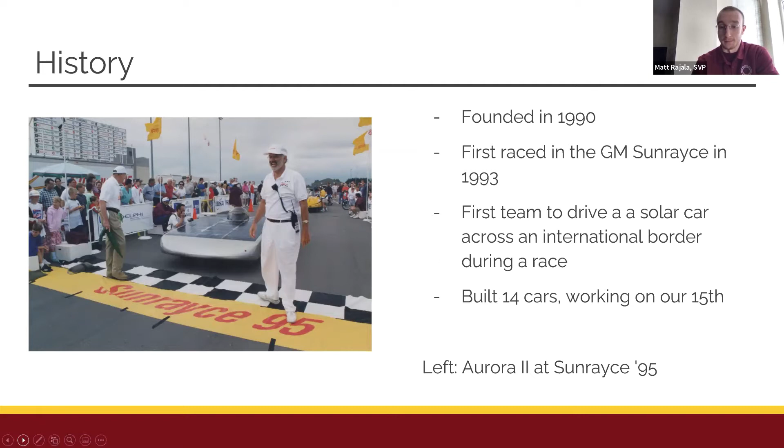To give you some history of the team, we were founded in 1990 by a group of students. We first raced in the General Motors Sunrayce in 1993, and we were the first team to drive a solar car across an international border during a race, which was into Canada. In our past, we have built 14 cars, and we are currently working on our 15th. The 3 main competitions we race in are the Formula Sun Grand Prix, the American Solar Challenge, and the Bridgestone World Solar Challenge, which is in Australia.

Here's the demographics of our team. On the left you'll see all the different majors represented. Our largest major is mechanical engineering, however about half of our team is computer engineering, electrical engineering, or computer science. We do have a good mix of majors across CSE and other colleges as well. On the right you'll see the years in school of our team members, and we have a good mix there too, which is also what we like to see.

So to talk about our races, the first race I'll talk about is the American Solar Challenge, which we refer to as ASC. ASC happens in the summer of even years usually, although it also happened this past year because of COVID delays in 2020.

This race is really interesting to us because it's a different route each time. While it is in the United States, geography across the country varies dramatically, so the requirements and design for the car have to change to accommodate that. With the route changing each time, the race is usually between 1,500 and 2,000 miles, and somewhere between 5 and 8 days long. So this is a race on public roads for endurance over multiple days. On the right here, we have EOS 2 racing in the American Solar Challenge in 2018.

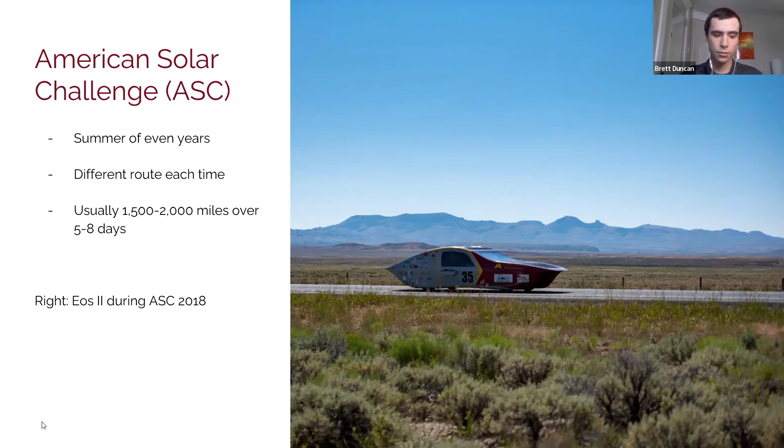The Formula Sun Grand Prix is a track race, actually the only track race that we race in. This race happens every summer, and during even years it acts as the qualifier for the American Solar Challenge. So what that means is you either need to get a minimum number of laps on one day, or some larger minimum number over multiple days, in order to qualify for the road race. This is just to make sure teams have a roadworthy car capable of driving those thousands of miles that they will need to.

Recently we're only attending on years that ASC happens, but we've won this race 6 times, which is more than any other team, and that's something we're pretty proud of. This is Centaurus 3 during the 2011 FSGP.

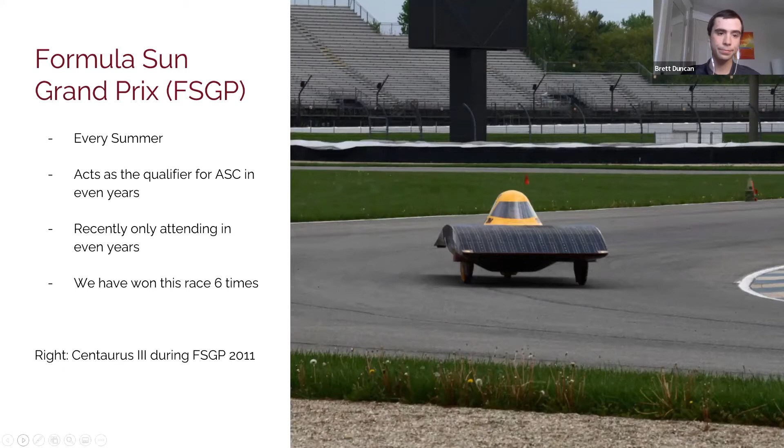Finally, the third race we race in is the Bridgestone World Solar Challenge. This is really the premier solar car race. It takes place during the fall of odd years in October, and it's always the same route. It's in Australia, 3,021 kilometers from Darwin in the Northern Territory along the coast to Adelaide in South Australia, which is along the southern coast. So this is a bit of a different design challenge, very harsh conditions, but the conditions are also a bit more known since it's always the same route.

We'll have experienced members from previous races usually go along and give guidance to the younger members so that we have a better idea of what we're doing. This is a pretty big commitment for team members who go to this race. The team travels there for a little over a month, usually leaving in mid-September and coming back in October after the race is complete. On the right here, we have EOS 2 at the starting line for the Bridgestone World Solar Challenge in 2019.

So these races have 2 different vehicle classes, so we'll talk briefly about those. The first class is the single occupant vehicle class, and as the name says, the cars only have a single occupant who's the driver. These cars are built for speed and efficiency. We've built 10 of these. We no longer build these, but we built these for the majority of the time the team's been in existence.

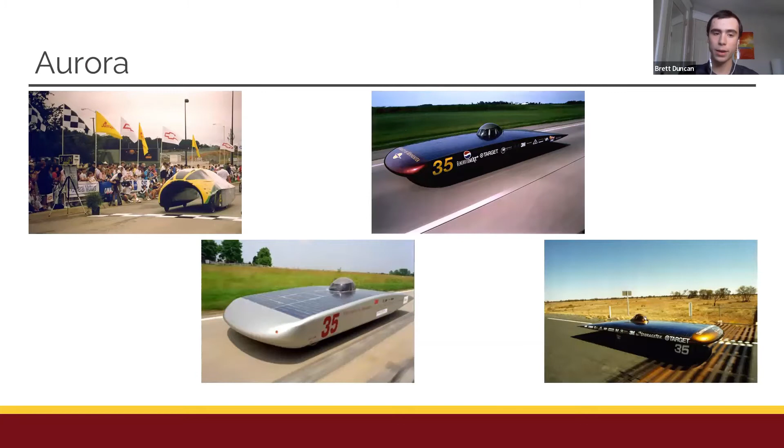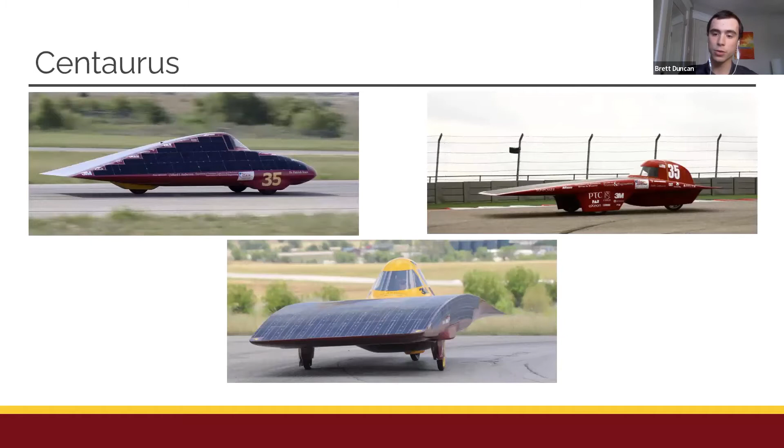But what we currently race in is called the multi-occupant vehicle class. These vehicles have 2 to 4 occupants. While we're still trying to make an efficient car that can make the best use of solar power possible, we also keep real-world practicality in mind and try to build a car that's much more similar to what a commercial EV that you might go out and purchase would be. The reason for this is that practicality is a scoring multiplier in this race.

Unlike the single occupant vehicle class, where the race is much more like a race you'd expect, with the first car to cross the finish line winning, the base scoring formula here is the number of people you have in your car times the distance you carry them, divided by the energy used from the grid. So in this class, you can charge using a standard AC EV charger, and that counts against you.

So you're incentivized not to do that, but you might need to be able to complete the race. And we've been competing in this class since 2013, when this class was first created at the Bridgestone World Solar Challenge.

The main reason we switched to this is we just wanted to really be pushing the envelope in terms of technology and building cars that are not just fast, but also more practical and more similar to an EV that you might one day buy.

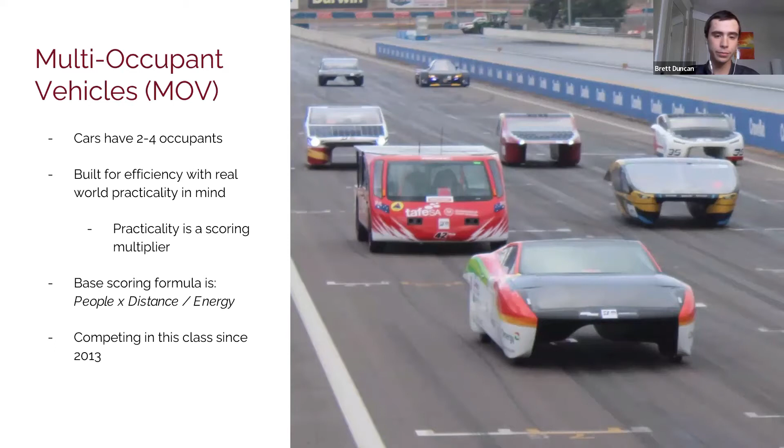The first car we built for this class was Daedalus, and this car only raced in the Bridgestone World Solar Challenge in 2013, where it placed fourth, which we did quite well. Not only was this our first car in the class, but it was also the first American-made multi-occupant vehicle, so that's something we're pretty proud of.

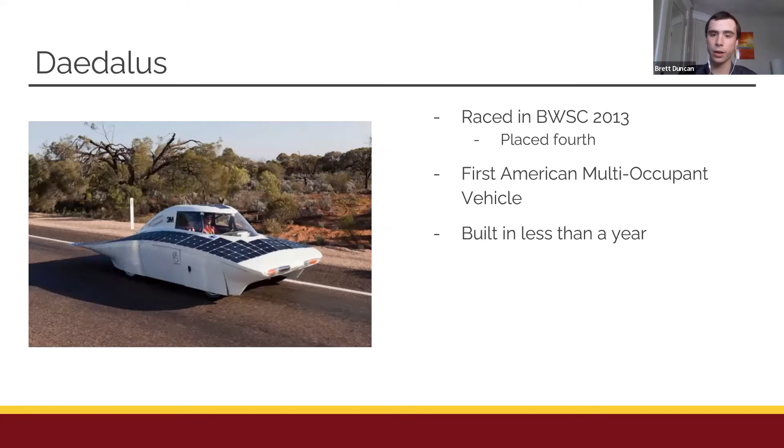And we built this car really quickly, in less than a year. Usually it takes longer than that, but the group of people who built this car were really motivated to get it done and get it to Australia to compete in that race.

Then after Daedalus, we have EOS 1 and EOS 2. EOS 1 raced for the first time in the World Solar Challenge in 2015, and EOS 2 raced for the first time in 2017. As you can see, they're both pretty similar in design, but EOS 2 took a lot of what the team learned from building and racing EOS 1 and worked to improve and iterate on that.

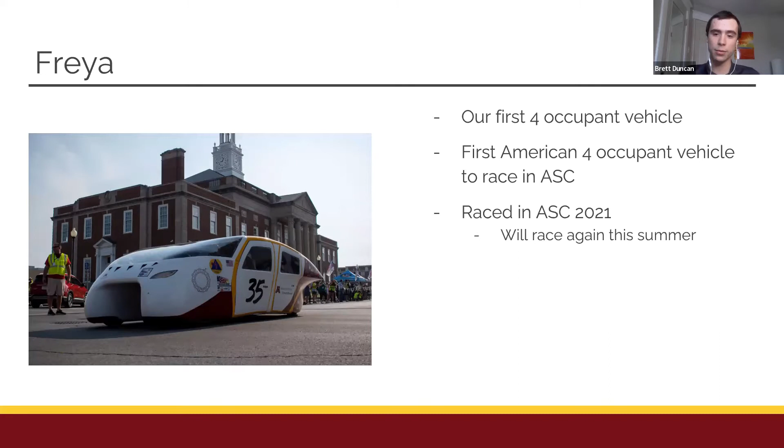Then most recently, we have Freya, our first 4-occupant vehicle. It's also the first American 4-occupant vehicle to race in the American Solar Challenge. We raced it this past summer and got second place, and we'll race it again this summer, hoping to win, working on making some improvements to it right now that we're pretty excited about.

To give you an idea of what race day is like day to day: we get up before sunrise and get the car ready to charge, because we really want to maximize the amount of solar power that we get. We normalize the array panels, pointing them towards the sun as it comes up, just to maximize the amount of solar power we get.

Every little bit helps. Not only is it power that we might need to complete the next stage of the race, but the more power we get from the sun, the less power we might need to get from the grid later on. So that helps boost our score.

For most of the race, we're camping either at a campsite, or in Australia you can actually just camp along the race route. Then we'll eat breakfast and get ready to drive. People get into their assigned vehicles and do all sorts of procedural checks to make sure the car is in working order and ready to drive on the road.

Once we start driving, the driving time is usually around 8 hours, usually with some sort of break in the middle of the day at a checkpoint.

The driving speed depends on multiple factors. Of course, we need to follow the speed limit because this is a race on public roads, but primarily it's weather and geography that determine how fast we drive on any given day. Weather such as wind or clouds affects how much energy we need to drive, or how much energy we're going to get from the sun.

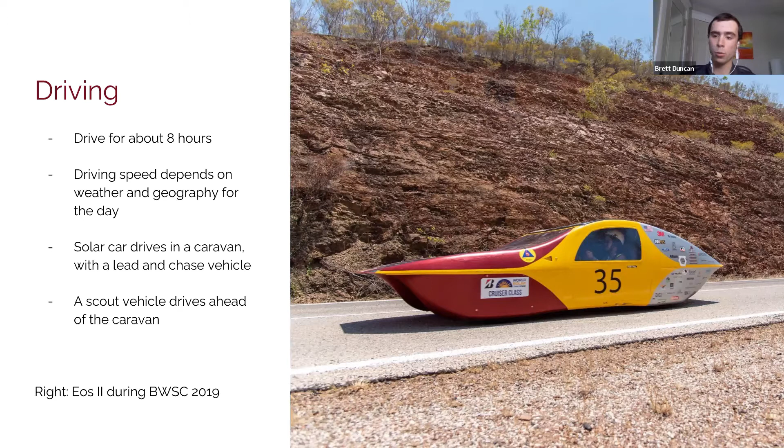We also have a scout vehicle that drives much further ahead to give us an idea of road conditions, as well as look for changing weather conditions we might not know about. That's especially important in the World Solar Challenge, where communications and internet are more limited, so having that is super helpful to us.

Throughout the race day, we might hit a checkpoint or stage stop. These are mandatory stops during the race that all teams are required to stop at. Checkpoints, depending on the race, are either 30 to 45 minutes long. This is an opportunity to make all teams stop, give the drivers a break from driving, let people switch out of the cars. This is really mainly for safety, to make sure that people aren't trying to push themselves too hard all day by driving without stopping because they don't want to lose that little bit of time. So these are just there for safety.

Stage stops end racing for the day, and then the next stage would begin the next morning.

On the right here was a checkpoint during this past American Solar Challenge during the second stage in La Junta, Colorado. We were pretty excited when we got there — we were actually the first team to get there, somewhere between 150 and 200 miles ahead of all the other teams. We managed to get in front of a rainstorm and had sun almost the entire time while other teams got stuck farther behind. So we were pretty excited to get there.

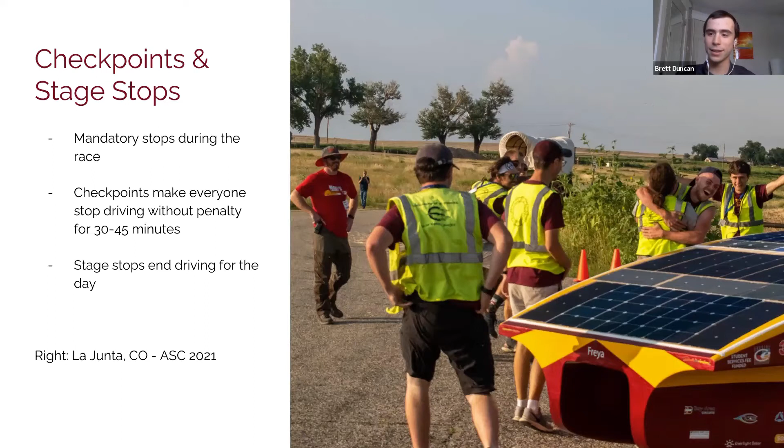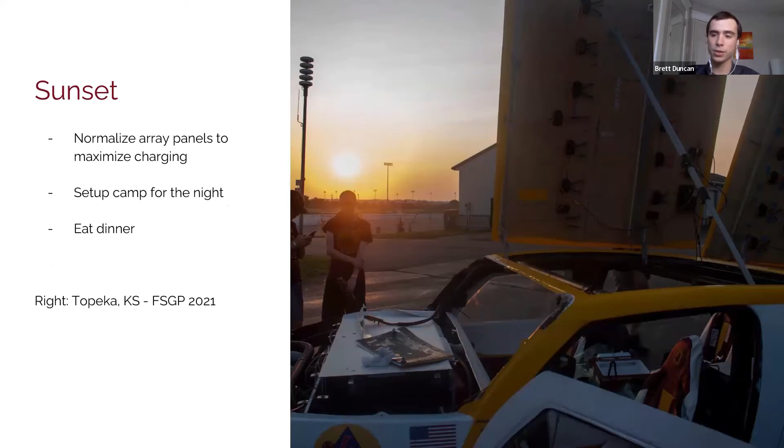Finally, during sunset, we want to maximize the amount of power we can get before the sun goes down. So once again, we normalize those solar panels to get as much charge as we can. We set up camp for the night and eat dinner.

At night, we have the option to use a Level 2 AC charger. During the World Solar Challenge, this is more limited — you can't do that every night, only at two different points during the race. But on the American Solar Challenge, we have the option to charge nightly, though it's metered, so it counts against us. So we try to do that as little as possible.

Then we'll take a look at the car and see if there's anything that needs to be repaired. Usually we'll change tires. And then, after a long day of racing, we try to get some sleep so we can get up and do it again tomorrow.

Now, going into the structure of our team and how we're laid out: we have two main parts of the team. We have our operations side of things, and then our engineering side, which is further divided into four sub-teams.

First, going into what our operations team does — they handle all of the business stuff on the team: finance, organizing different events, talking to sponsors, social media and marketing, and race logistics. So a lot of the communication and a lot of the business. They also do our merch design and make sure we have everything we need on the electrical or engineering side.

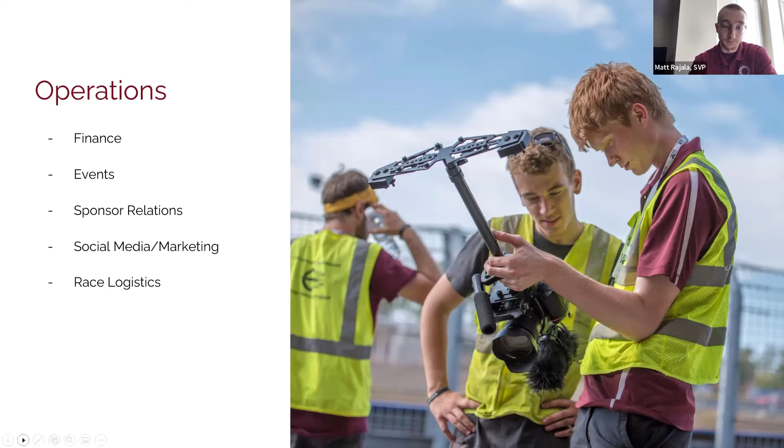The next sub-team we'll go over is composites and structures. They handle the aerodynamics of the car, which is a huge factor considering we have limited power — we need to maximize the output we get, so a lot of that is minimizing drag. They also work on chassis design, roll cage, battery design, doors, and airflow throughout the cabin. This is our most recent car, Freya, which was built last summer.

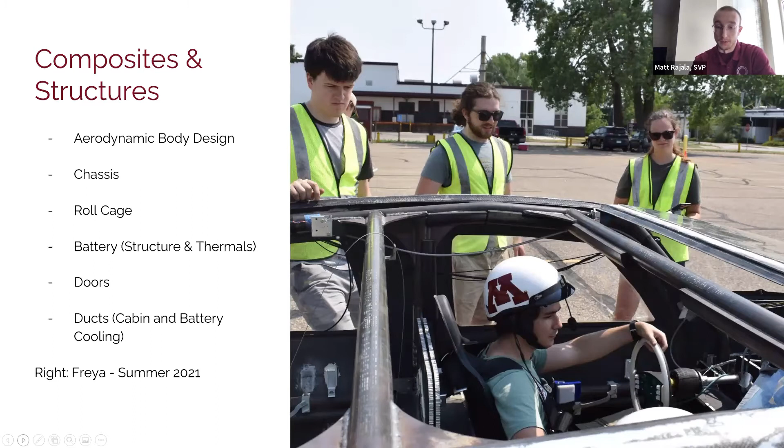Here you can see the aerodynamic body design. This is the first step in designing what the next car will look like, and it's the first system we want to lock in place to design everything else around. It's a highly iterative design process with lots of changes made to make sure it's the car we want it to be. We currently use Altair Virtual Wind Tunnel to test the aerodynamics of the car, and we've previously used ANSYS as well, which we still use for our mechanical side.

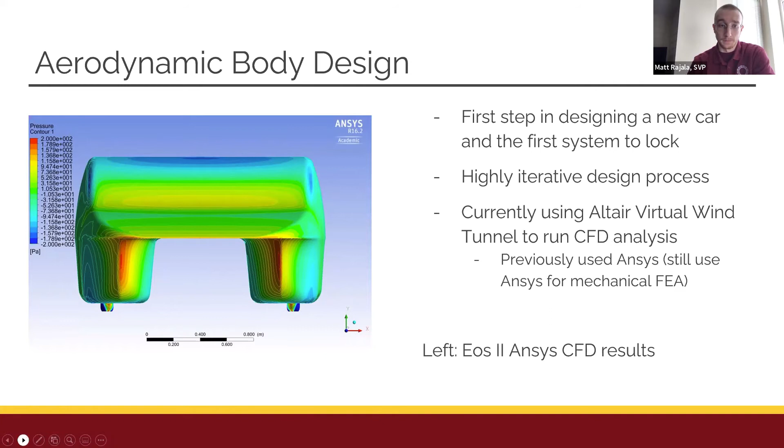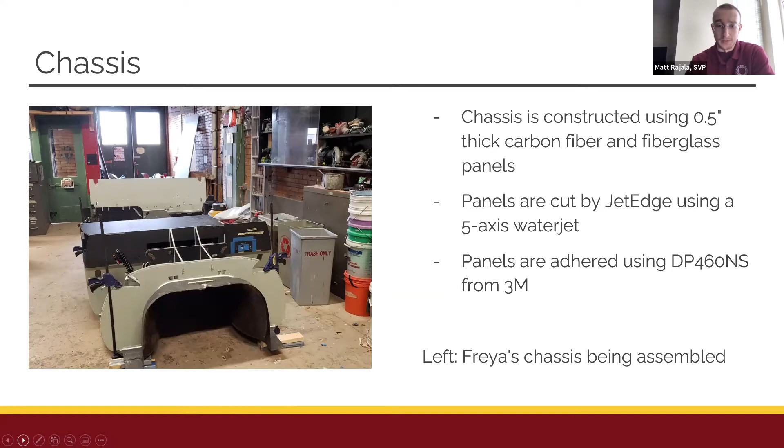Another system we work on for CNS is the chassis, which is constructed using half-inch thick carbon fiber and fiberglass panels. These are cut by JetEdge using a 5-axis water jet, and these panels are adhered using DP460NS from 3M. This is what gives the car its rigidity and structure, as well as being a point where we can mount all of our other mechanical systems. Think of it like the skeleton of our car.

Next we have the roll cage, which is required by American Solar Challenge regulations. They also cannot be composite, so they need to be metal. We make ours out of steel tubes, which make up the majority of our roll cage structure. The tubes are bent by a third-party company, then we tack weld them, and they're further welded by professionals for installation. This acts as a protection mechanism in the event of a rollover accident, which we thankfully have never had to use yet on the team.

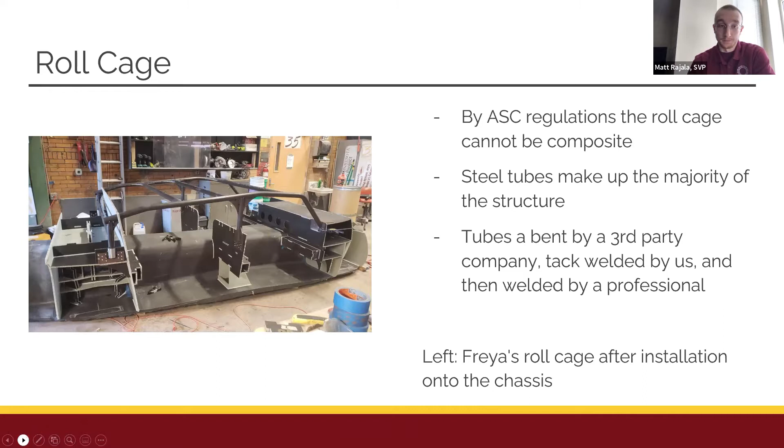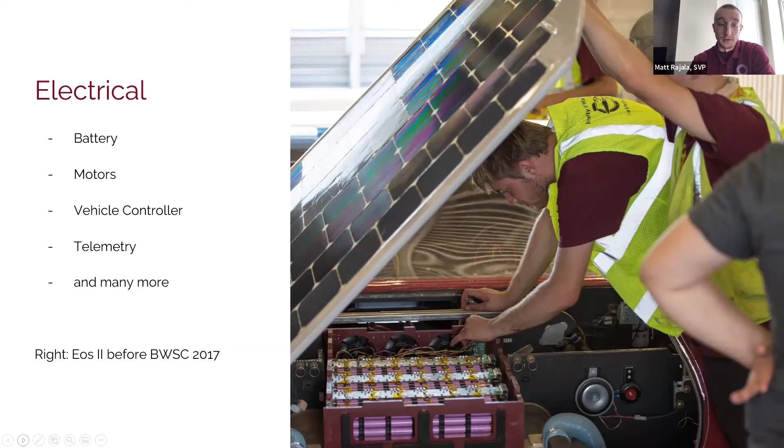Getting more into the electrical side of things, our team deals with all of the electrical components in the car. I'll go over the battery, the motors, vehicle controller, telemetry, and there are many other small systems that work together to make the car drive.

Going over a general overview of the car, we have our 130 volt high voltage bus, our 24 volt low voltage bus, and our 125 kilobaud CAN bus. All the printed circuit boards in our car are designed by students using Altium.

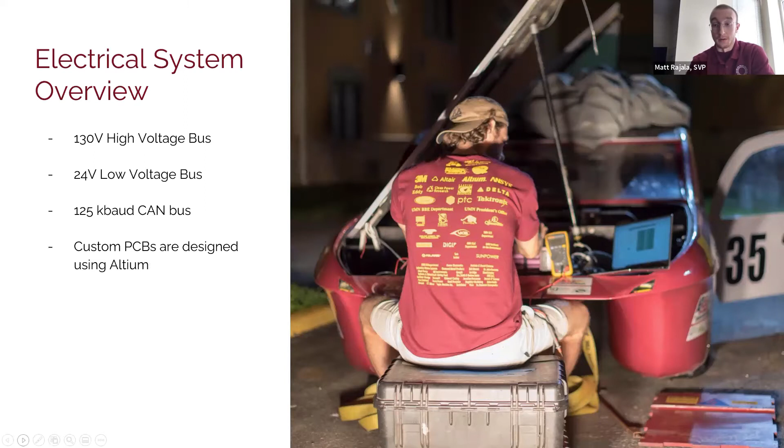Going over the battery, we assemble all of the individual cells in parallel into modules, which is done by spot welding into a nickel sheet. These modules are placed in series, giving our car the desired voltage of about 95 to 150 volts, which powers all the systems on the car. We also have our battery management system, which monitors the battery health and performance to give that information to all the different boards when making decisions regarding motors or anything else that requires significant energy.

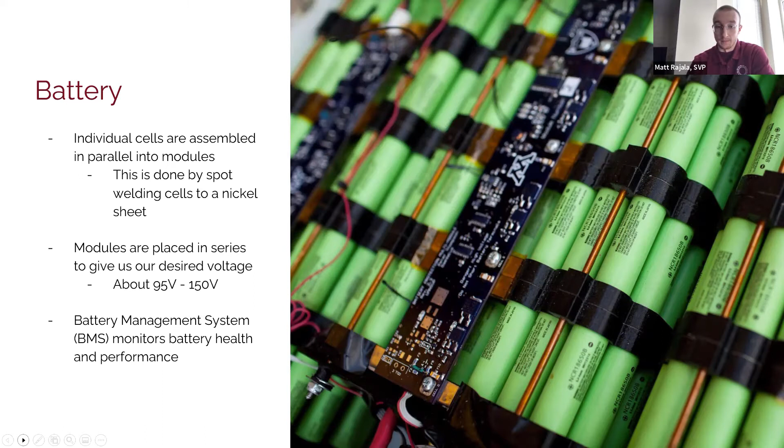Now going into the motors, this is one of the parts our team is most proud of. We're one of the few teams to design and build our own motors at the different solar challenges we go to. We custom design our own permanent magnet AC motors. These typically have a top speed of about 65 miles per hour, similar to how a normal car would be on the road. They're designed with the car size and number of passengers in mind to give us the right output of power for driving the car.

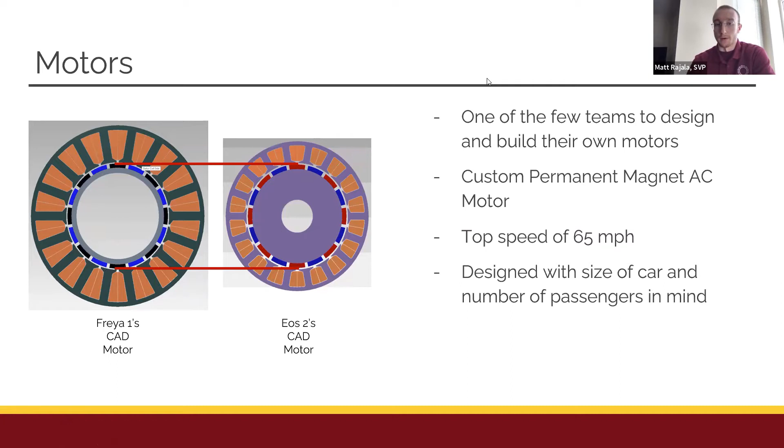The next system we'll go over is the vehicle controller, sometimes called the flight computer, which is the brains of the car. It takes in measurements from the brake and accelerator pedals, and that information is used to drive the motor controllers. It also communicates with other systems over the CAN network, controlling the lights and motor controllers via CAN. It also takes information from our steering wheel, center console, and charger, so we can monitor all of our systems with this board.

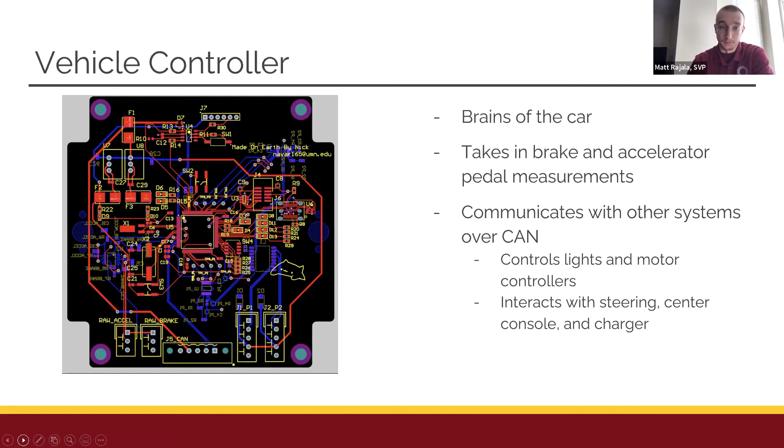Next we have our telemetry system, which is responsible for outputting all of the information in the car. It logs all of our messages from the CAN bus onto a micro SD card, and transmits critical messages via the XBee radio transceiver. That information is sent to the program we run on our laptops, which monitors all the critical information from the car. It also supports sending data over a USB serial connection.

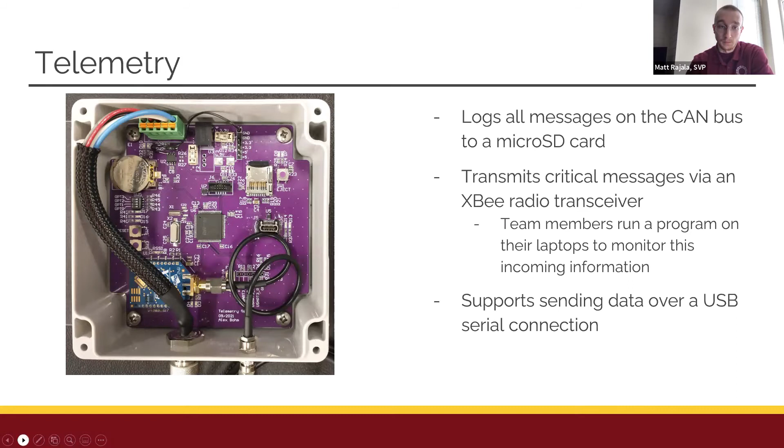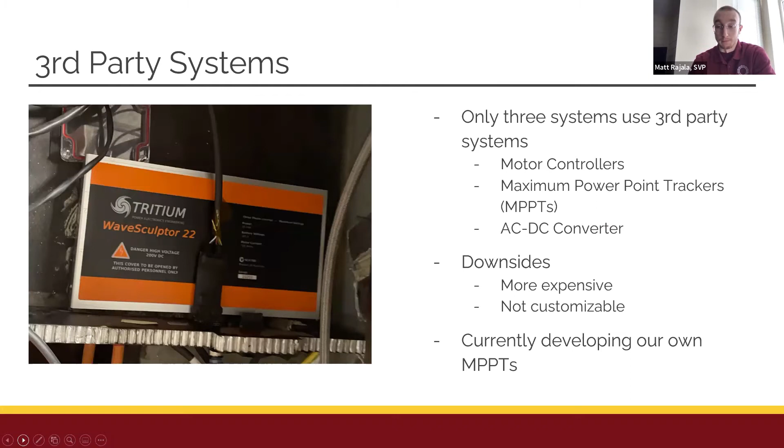We like to maximize the amount of proprietary systems on our car, but we do have 3 third-party systems: the motor controllers, our maximum power point trackers, and the AC to DC converters. The downsides of having third-party systems are that they're not as customizable as we'd like and are typically more expensive. However, we are currently working on developing our own maximum power point trackers, which should be implemented in future iterations of our cars.

Moving on to the mechanical side of things, we have 5 mechanical systems: motors, suspension, steering, speed control, and rims.

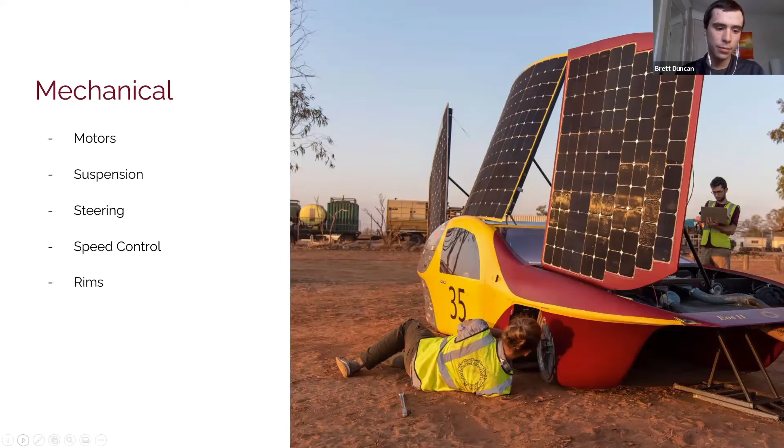So to start with motors, we do custom design motors. We design basically everything in the motor, from the housing to the stator to the rotor, then the axle and the hub, all designed ourselves. We have one motor directly driving each rear wheel on the car.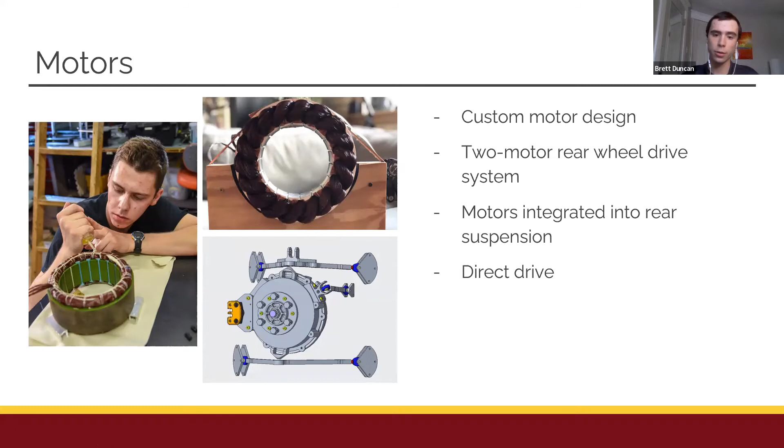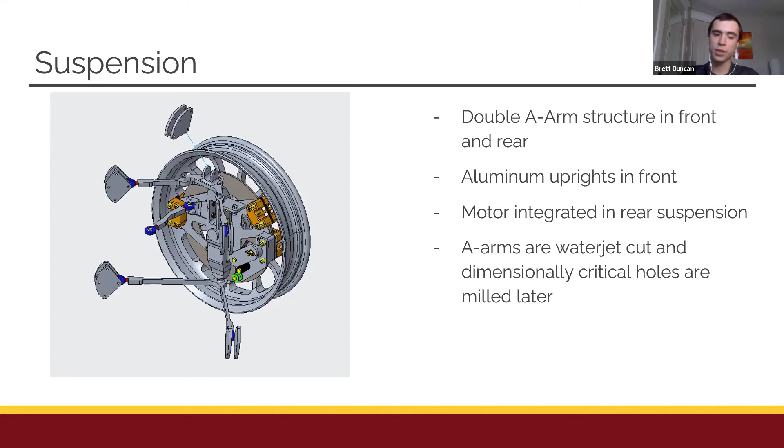These motors also act as a structural component for the suspension, so there's no upright in the rear, it's just the motor housing taking that structural load. For the suspension, we have a double A-arm structure in both the front and the rear. In the front, we have an aluminum upright, and in the rear, the motor acts as that structural component. We water jet the A-arms ourselves and then mill any dimensionally critical holes later on.

For steering, we do a 3-part design: the driver interface, the gearbox, and then routing. As you may have seen in pictures of the cars previously, we have a pontoon style design, which means we have what we call the tunnel in between. This creates a bit of a challenge because we need to route that steering to both front wheels, so we have to go up and over that tunnel - just a bit more challenging than what we'd have to deal with in some other vehicle designs. We use a custom gearbox design as well as a custom steering wheel, but we purchase some components such as the U-joints because they'd be too difficult to design and manufacture ourselves.

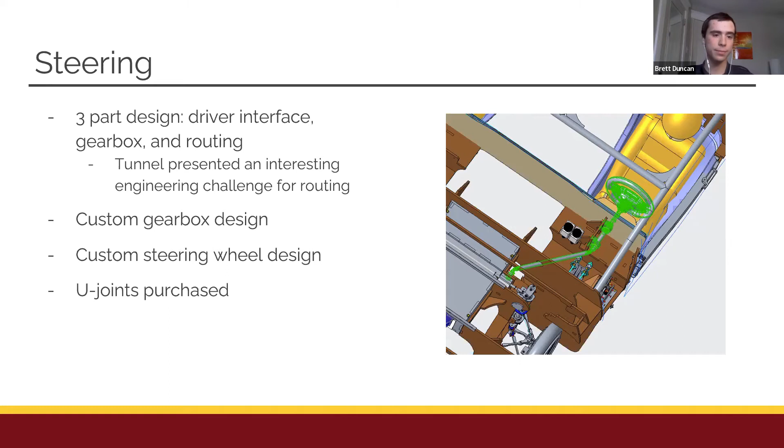For speed control, this is really the accelerator, brake, and parking brake. We have 2 independent hydraulic braking systems to increase redundancy and improve overall vehicle safety. It's also required by regulations for the American Solar Challenge. A mechanical parking brake, of course, we want to have so the car doesn't roll away while we're charging off the sun, or just have the car parked somewhere.

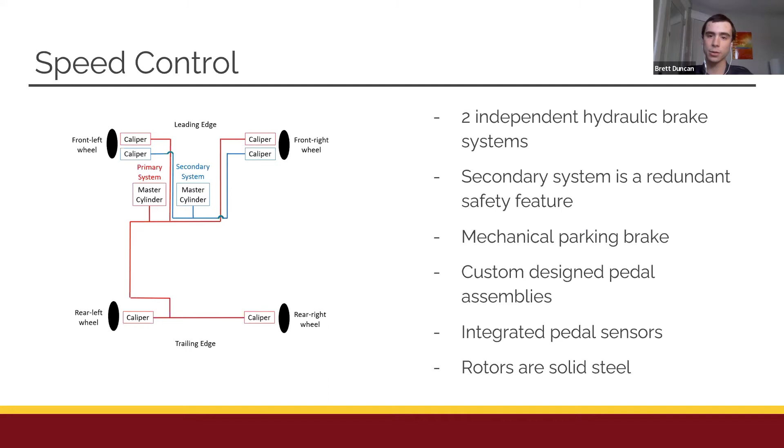We have custom designed pedal assemblies with integrated pedal sensors. These sensors are read by the vehicle controller, on both the accelerator and brake pedal, so the car can decide how much to accelerate. When braking, we have regenerative braking to recover kinetic energy from the car and put that back into the battery, so we try to do that as much as possible for efficiency. We have solid steel brake rotors, but we try to avoid using the mechanical brake as much as possible, since when we do that we're just wasting that kinetic energy.

For the design and build cycle, we basically start with initial aerodynamic design, with some high-level concepts of what we want the car to look like. This is often before the regulations for the upcoming race are actually out, so we'll look at existing regulations, then once new regulations are out, take an in-depth look at those, see what's changed, and see how our designs need to change to satisfy that. After that, we'll set requirements for ourselves in terms of what we're designing for, both aesthetically and performance-wise, and what are the needs for other systems in the car. Then we'll iterate on these designs and analyze them using CFD.

Once we've made some progress on the aerodynamic design, we'll start doing more mechanical and structural design. This usually starts by reverse engineering and understanding how the systems on the previous car worked and why design decisions were made, as well as looking at things that maybe didn't turn out as well as we'd have liked, or were difficult to manufacture and install. At that point, we'll review regulations and set requirements - both how easy we want to make it to manufacture something if it was too difficult or expensive previously, as well as looking at expected load cases a component might have. Then we'll start those designs and use FEA to begin analyzing that.

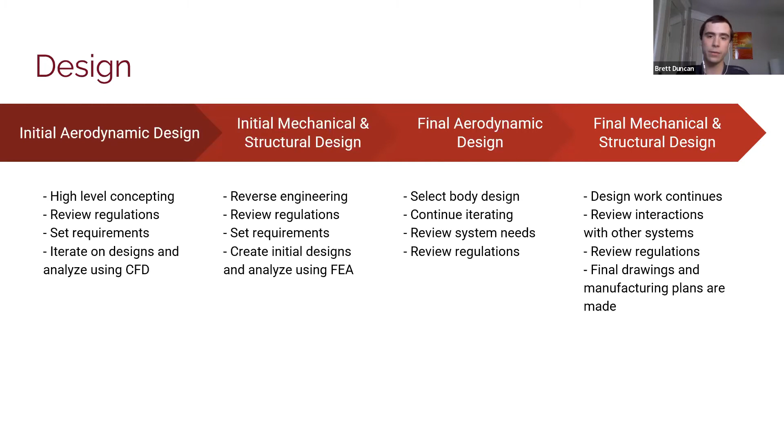After this, on the mechanical and structural side, those designs get finished up. Usually there's a fair bit of design work after the aerodynamic design is locked - a lot of reviewing of interactions with other systems, especially the chassis and other mechanical systems, then reviewing regulations and coming up with drawings and final manufacturing plans to make sure we have a path forward to manufacture the car. For the build of the car, we start by building the aerodynamic shell, which is a pretty time-intensive process.

So we start by purchasing molds for us to do composite layups on, and we usually use primarily carbon fiber, but some fiberglass for the car as well.

For the chassis, we'll start by prototyping with plywood, since it's much less expensive than composite chassis panels. This prototyping allows us to find any design errors that might prevent us from assembling the chassis, and makes sure the chassis fits the shell we actually have, since due to manufacturing issues the aerodynamic shell may differ some from the original design. At that point, those tweaks can be made before we begin manufacturing the final chassis.

After that, we'll go to the roll cage, get the steel tubes bent, tack weld it, and then professionally weld it. Then we'll install the mechanical systems. These are usually manufactured in parallel to the previous steps since they're not held up by anything. Once the structure of the car comes together, the mechanical systems can be put in place and tested to make sure they function at a basic level—making sure your steering works correctly, making sure your brakes work, stuff like that.

After this, there's still a lot to do. There are other structural systems that need to be installed, all of the electrical systems need to be installed, and really the last step is interior, doors, windows, and array.

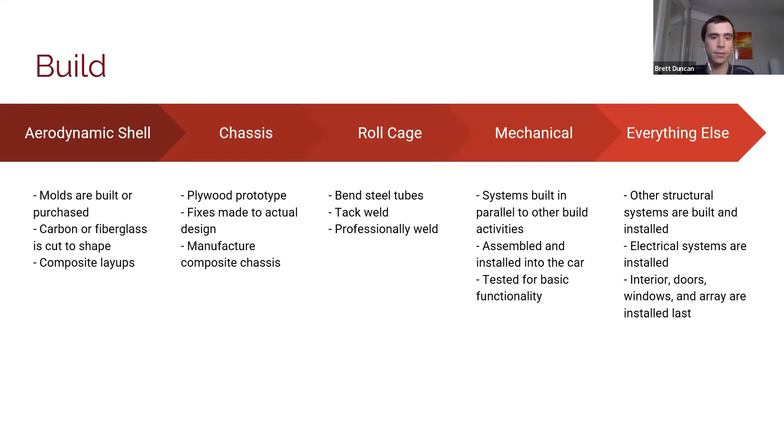After we've built the car, we're finally getting to the point where we can race it. We'll do test driving, make fixes, and learn how to diagnose issues and make repairs. For the World Solar Challenge, which is usually the car we design for first, we'll ship the car about 3 months in advance, arrive in Australia a month before the race, and continue some test driving.

Before we're allowed to race, there's a process called scrutineering. Scrutineering is basically the process of them making sure we've met all of the requirements laid out by the race regulations, and generally making sure the car is safe and roadworthy so that nobody gets hurt.

Then we have the chance to race, and after the race we take a look at the car and see if there are any improvements that can be made. Oftentimes these are the electrical systems, more so than the mechanical systems, just because it's a much larger undertaking to redo the mechanical systems than to replace a single electrical system. If there's any damage to the car, that'll be fixed.

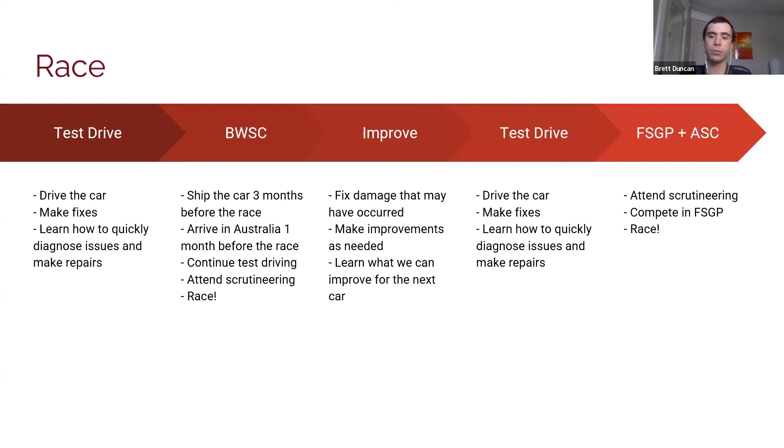After that first race, we'll spend time learning how we can do things better for the next car. Then once again we'll test drive, and the following summer will be the American Solar Challenge and FSGP, where we'll race again.

Currently, we're getting ready to race Freya in July, so we're doing some work on her. One of the big projects we're undertaking is the battery—we actually just received the battery cells to assemble the battery pack today, so we'll build a new pack. We're using 18650 GA cells from Panasonic this time. In the past we've used different cells, but this is what we were luckily able to get this time.

A big change from what we've been doing for almost the past 10 years is making this battery pack more modular. This will help us a lot with assembly and manufacturing, and just make it safer and easier to build and install.

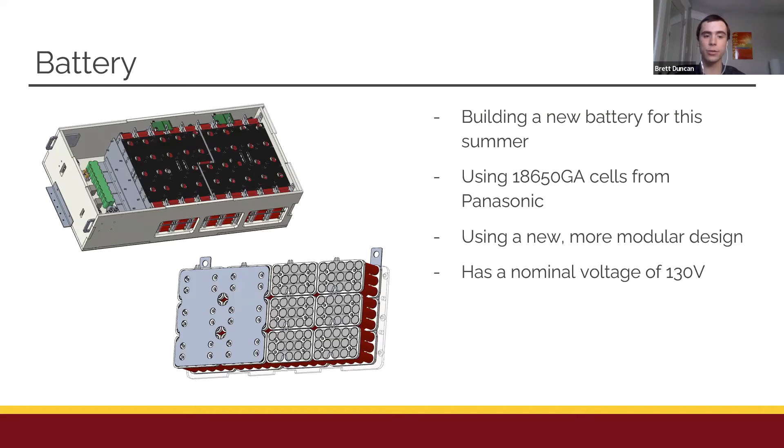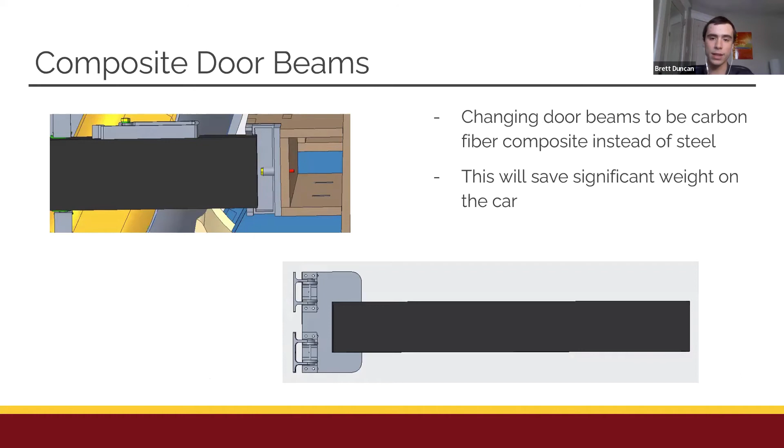Another change we're making on Freya for this coming summer is we're changing the door beams to be carbon fiber composite instead of steel. This is mainly a weight saving effort to reduce unnecessary weight in the car.

Then finally, we're revising pretty much the entire electrical system. One of the big motivating factors for this change is that we didn't have enough microcontrollers to make more backups of the boards we already had designed. So we had to make new designs, but we also used that opportunity to try to make our systems more robust and use more automotive grade connectors and components.

At the same time, we're also writing a lot of new firmware, moving from C to C++, and overall trying to make our software more organized and reusable to make the development process easier and reduce bugs in the future.

We're also simultaneously working on car 15 right now. We're still at the beginning of the build process, where we're iterating on previous designs and previous cars we've built, trying to improve our chances of winning future races. So that's optimizing the performance.

Car 15 will be racing in the Bridgestone World Solar Challenge in 2023, as well as the American Solar Challenge in 2024. And the goal in both of those is to win.

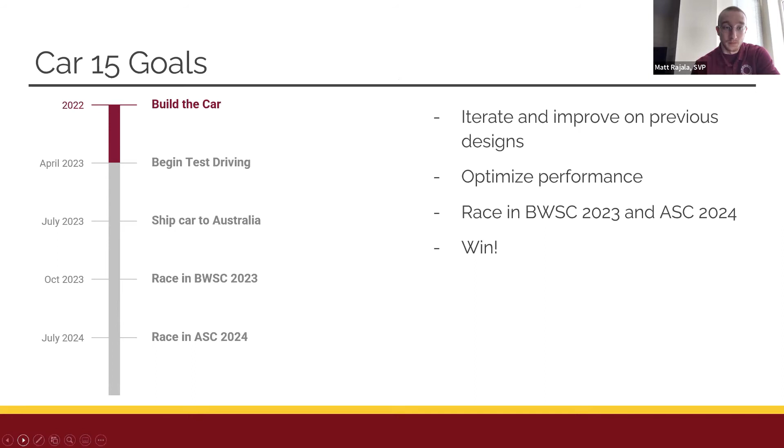Right now we're mostly working on design. A lot of systems and components are done being designed, but we're still going through some revisions on the chassis, the roll cage, the motors, battery, as well as the interior of the car.

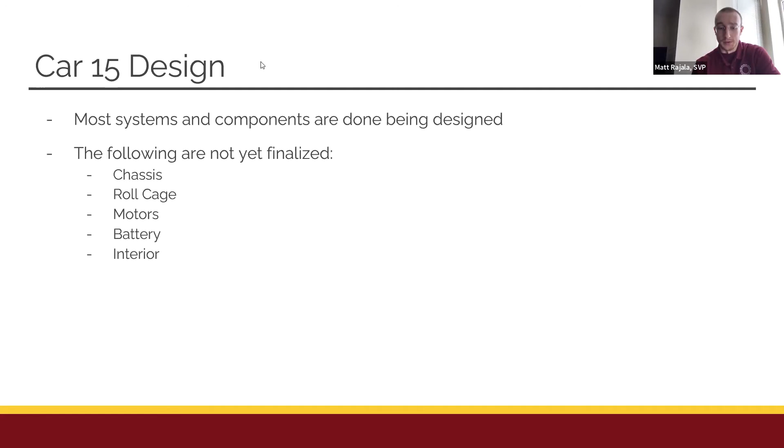Right now, one of the main efforts everybody on our team is working on is the composite layups of our next car. This is the outer shell of our next car, built primarily using carbon fiber and Nomex honeycomb core to give it its strength. The array panels will use fiberglass, since that's not as conductive.

This is again a very time-intensive process that requires many hours from everybody on the team, even if you're not on the composites and structures side of things.

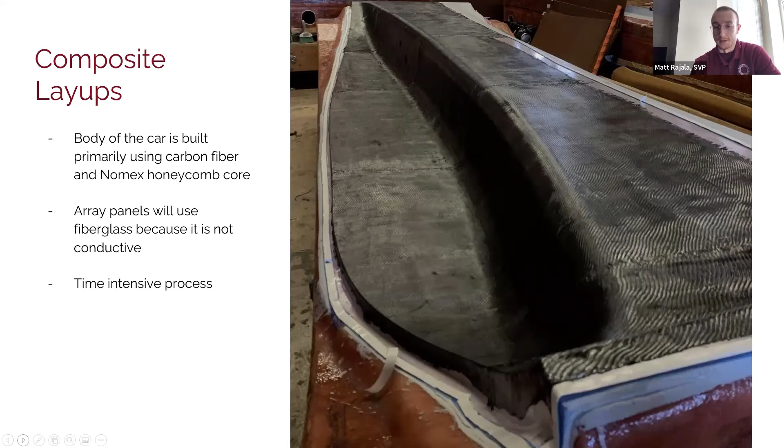We're also going to be shortly manufacturing our chassis, which is sort of the skeleton of our car. We're currently wrapping up the design work, and we're going to prototype using plywood before we do the final manufacturing.

A chassis panel will be cut using a 5-axis water jet, and it gives the car its rigidity, as well as giving us a place to mount all of the other mechanical and electrical systems for the next car.

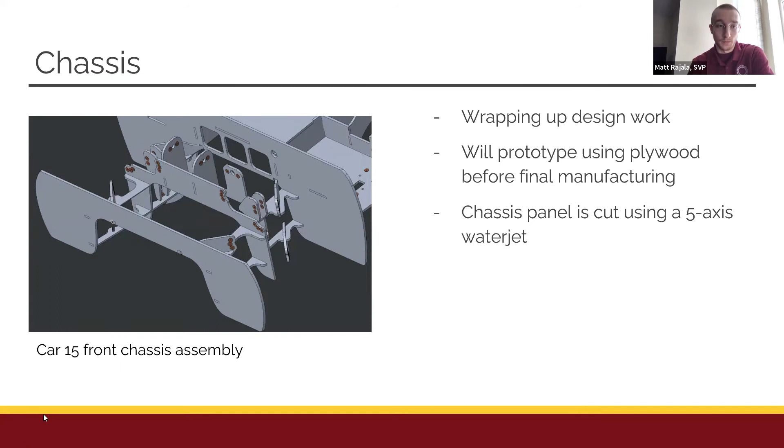On the mechanical side of things, we're working on manufacturing parts for the mechanical systems of the car, which involves a lot of water jetting in our machine shop. We're currently looking for manufacturing sponsors to help us with this effort. We're also continuing to work on the mechanical motor design of our next car.

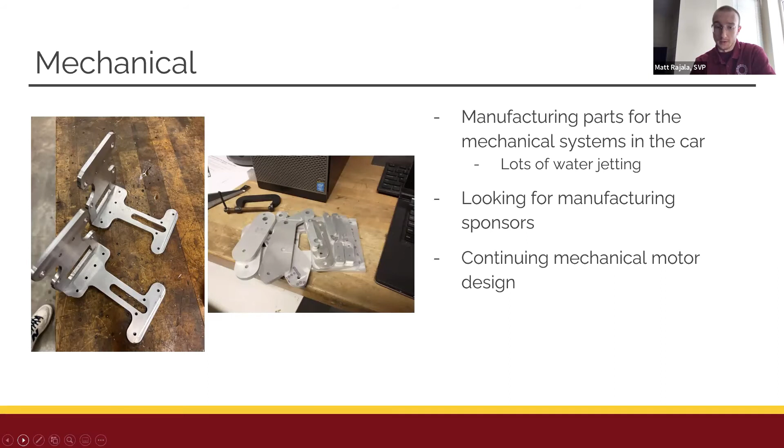A couple of challenges that have mainly come with the COVID-19 pandemic: we are currently unable to use some of the resources we previously had from some of our sponsors. Another large challenge is the supply chain issues, which I'm sure all of you are familiar with, the microcontroller shortage or semiconductor shortage across the world.

We've had to redesign many of our electrical systems to use different microcontrollers to combat this, which is due to the long lead times in production for our previous components.